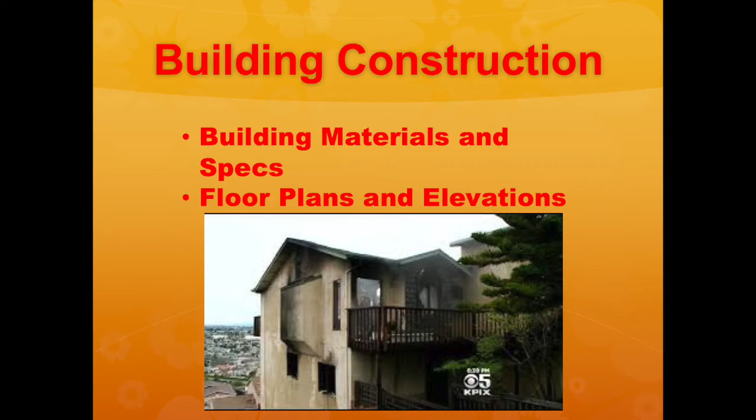Building construction. I'm going to talk about the building materials and specs used on the structure and also show you the floor plans and elevations. Later on, I will discuss how the fire started and how it developed. It was a 4-story structure, approximately 4,000 square feet. On the second floor, it had a roof deck, kitchen, dining, and living room with a balcony on the rear.

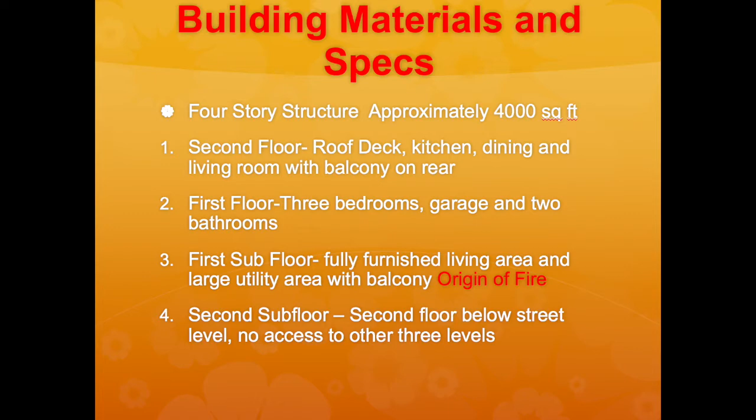On the first floor, it had 3 bedrooms, a garage, and 2 bathrooms. On the first subfloor, it had a fully furnished living area and large utility area with balcony. This is the origin of fire. The second subfloor had no access to the other 3 levels. Roof type was flat. Exterior used was a 5/8" plywood siding on the first and second floors. Stucco was used on the first and second subfloors.

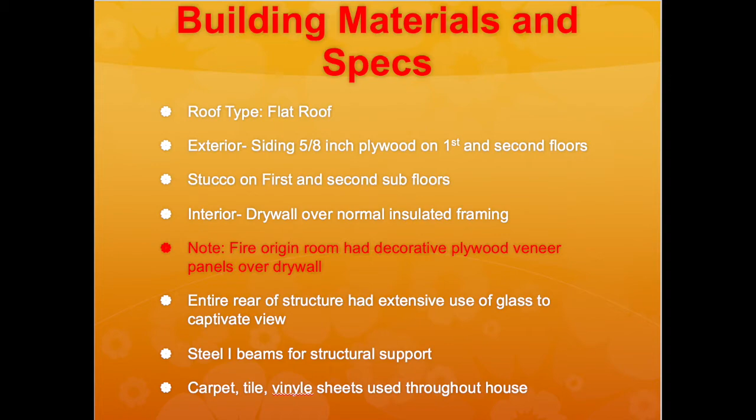Interior was drywall over normal insulated framing. Fire origin room had decorative plywood veneer panels nailed onto the drywall in the entire room. This created an additional fuel source for the fire. The entire rear of the structure had extensive use of glass to captivate the views. Steel I-beams for structural support were used, and carpet, tile, vinyl sheets used throughout the house.

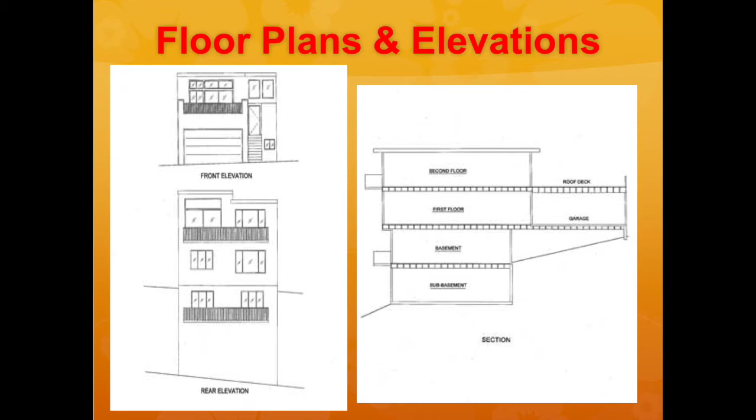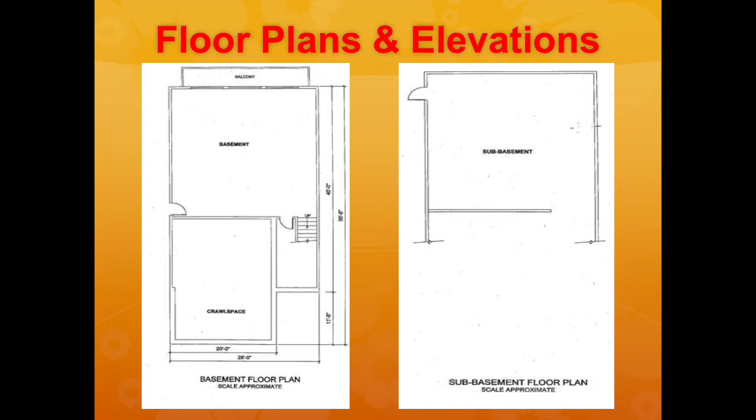This is the first and second subfloor plan. Basement floor where the fire started. How did the fire start? The fire started on the west side of the family room in the first subfloor. Fire ignition was initiated by a handheld vacuum cleaner located near the rear basement windows. The closest significant fuel package was a couch in the middle of the room.

Failing of the window near the origin allowed oxygen into the depleted oxygen environment, which caused flashover. This extreme heat followed the natural flow path across the floor level, up interior stairs where both firefighters were located. First subfloor also had a wooden balcony, carpet in the entire room, as well as wood bookshelves and end tables for fuel. There were 3 developments in the fire growth.

The first was the initial couch fire from the vacuum cleaner electrical malfunction. That is indicated by the 1. The second was secondary furniture fires in the room. These were end tables and bookshelves and other furniture. These are indicated by the number 2s. And the third development was the balcony fire that occurred after the window had failed. The fire jumped into the balcony and flashover occurred. And this is how the fire developed.

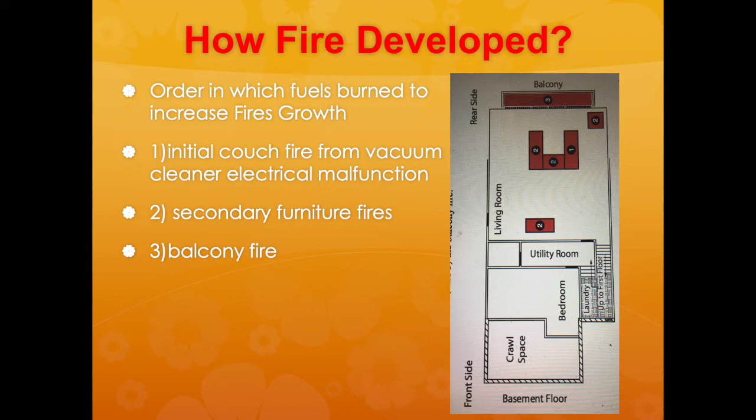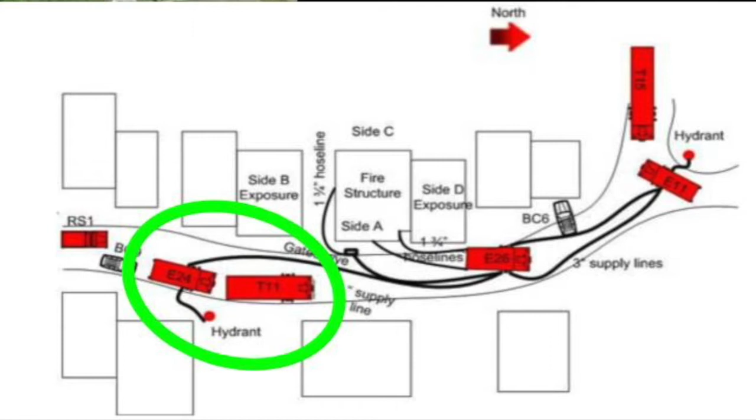Many engines arrived on side A of the house. Engine 26 was the first crew who entered the house. Engine 11 and Engine 24 arrived on scene afterwards, along with Rescue Squad 1, Truck 11, Truck 15, the Battalion Chief 6, and the Battalion Chief 9. For the apparatus layout, Engine 24 was on the far left side next to the hydrant. They were supplying water to Engine 26 with a 3-inch hose line.

Engine 11 was already on scene with a 1 3/4 hose line, but they also had a 3-inch hose line connected to Engine 26. They were located on the far right next to the hydrant. While Engine 26 was already in the house, they had their emergency signal on, which was announced from dispatch. That is when the incident commander took charge and contacted Engine 26 via radio multiple times, but they did not respond.

The incident commander then assigned Engine 24 and a split crew from Rescue Squad 1 to back up Engine 26. The incident commander then wanted the rescue squad to try to make entry through the garage, but they could not advance due to extremely high heat conditions. Then the battalion chief forced entry with Engine 11 on side B. Engine 11 entered with a 1 3/4 hose line. Simultaneously, Rescue Squad 1 re-entered on side B.

This was all done with zero visibility conditions, which is when they found the lieutenant and the firefighter already downed. They informed the incident commander that the lieutenant and the firefighter were found right away. However, the incident commander was not aware that they had been badly injured. Once the incident commander was alerted of their injuries, they were then rushed to the hospital immediately.

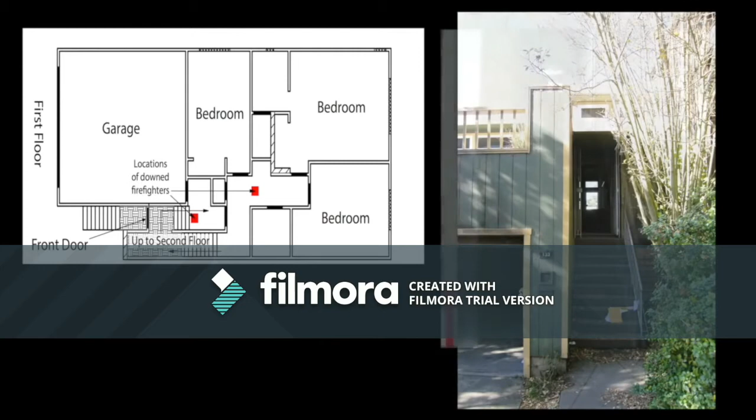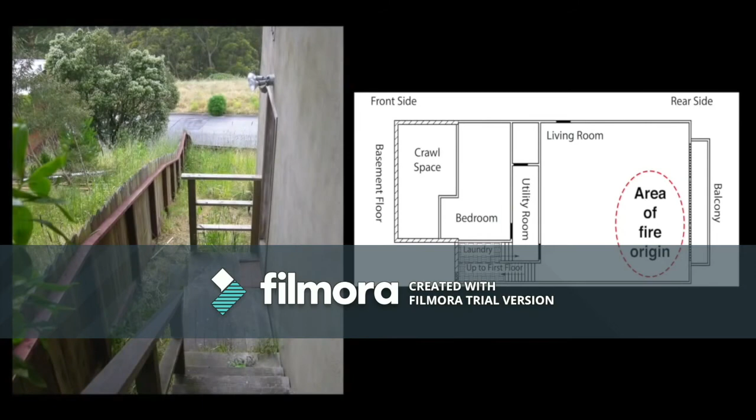Battalion Chief 9 arrives on scene at 10:53 hours. At 10:54 hours, Battalion Chief 9 has a face-to-face with victims 1 and 2. The Battalion Chief is informed by the victims that the fire is below the first floor. Battalion Chief 9 informs victims 1 and 2 that they are going to attack the fire from side Bravo of the house. The victims acknowledge but do not follow Battalion Chief 9 outside.

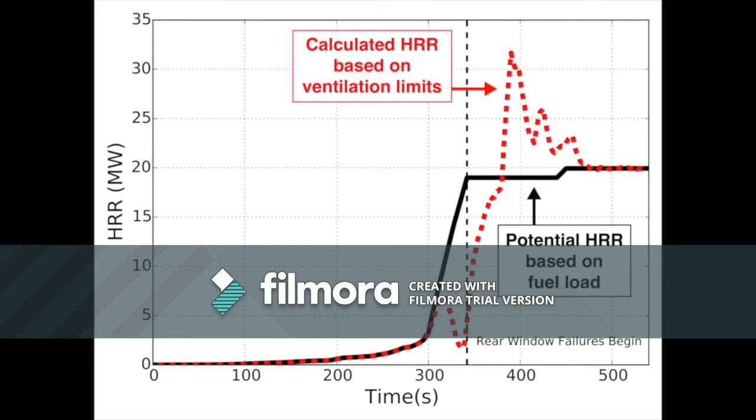At 10:58, the fire self-vents through a 6-panel wall of windows on the Charlie side of the house. The heat release rate quickly rises from less than 5 megawatts to around 25 megawatts within a period of 1 minute. The natural air ventilation that occurs from this window failure pulls fresh, cold air into the basement and up the stairs, creating a funnel of new hot gases into the first floor hallway where Engine 26 is operating.

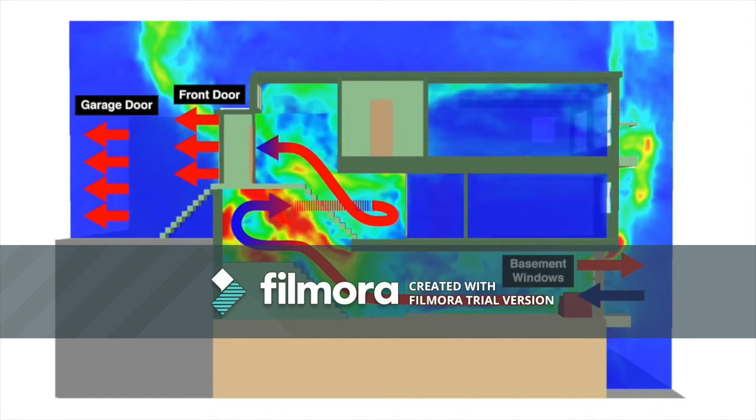At this point, the situation on the first floor shifts from tenable to untenable, as the temperature quickly rises from around 300 degrees Fahrenheit to over 700 degrees Fahrenheit. At 11:05 hours, 2 engines, a truck, Rescue Squad, and Battalion Chief 9 are directed by Incident Command to search the top 2 floors. Incident Command believes that Engine 26 is with Battalion Chief 9 on B side.

At 11:08 hours, Engine 24 Lieutenant finds victim number 1 in first floor stairs to basement and garage. Seconds later, Engine 24 Firefighter finds victim number 2 in first floor hallway. By 11:10, victims have been removed from the house and 2 medic units are called in. Victim 1, a lieutenant, was pronounced dead at the hospital. Victim 2, a firefighter paramedic, died 2 days later. Victim number 1 had 40 to 50% burns to his body, while victim number 2 had 30 to 40% burns. PPE was unharmed.

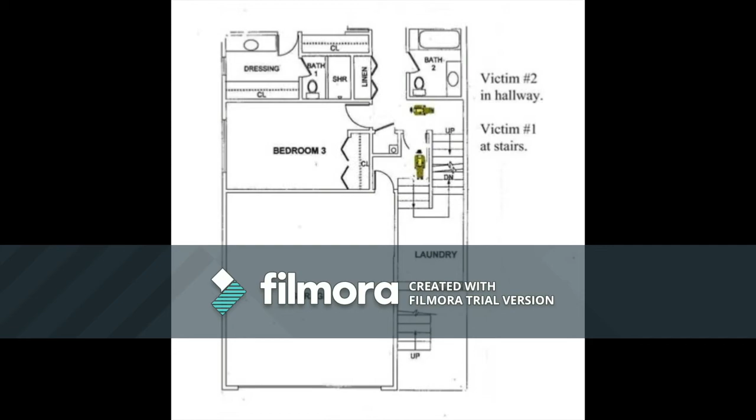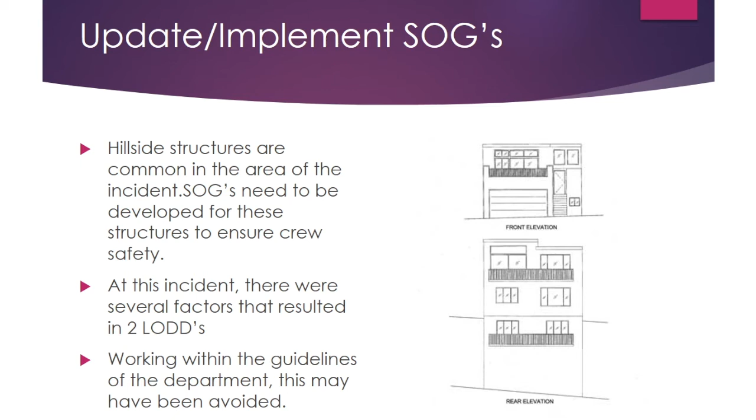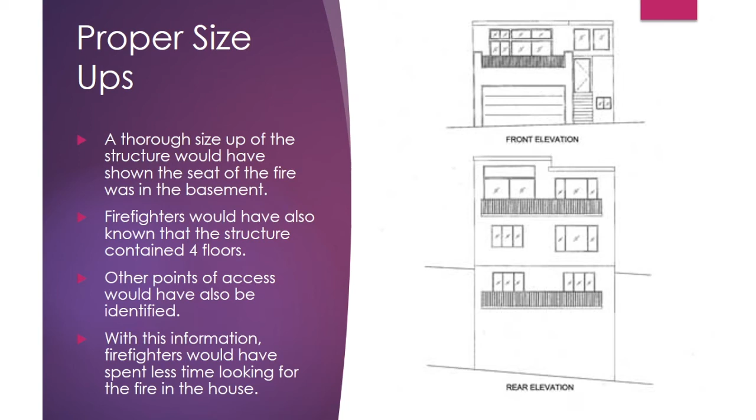Proper size-ups. A thorough size-up of the structure would have shown the seat of the fire was in the basement. Firefighters would have also known that the structure contained 4 floors. Other points of access would have also been identified. With this information, firefighters would have spent less time looking for the fire in the house.

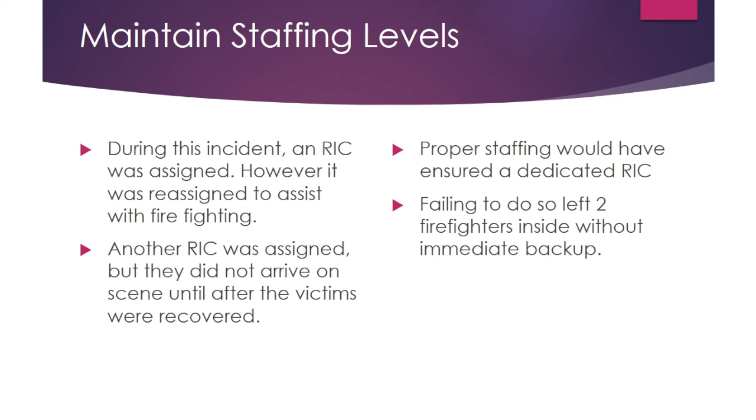Maintain staffing levels. During this incident, a rapid intervention crew was assigned. However, it was reassigned to assist with firefighting. Another rapid intervention crew was assigned, but they did not arrive on scene until after the victims were recovered. Proper staffing would have ensured a dedicated rapid intervention crew. Failing to do so left 2 firefighters inside without immediate backup.

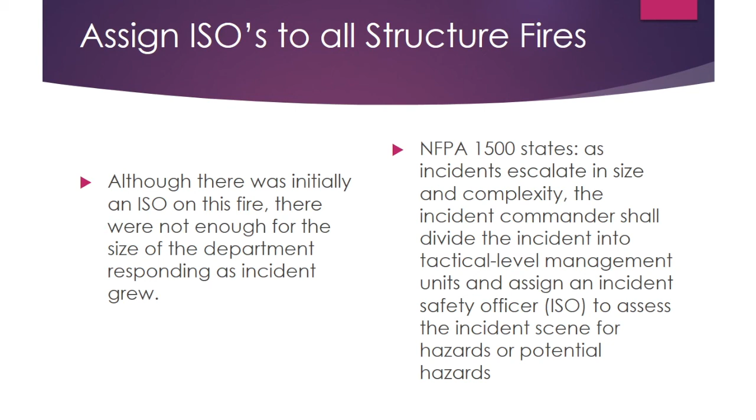Assign incident safety officers to all structure fires. Although there was initially an incident safety officer on this fire, there were not enough for the size of the department responding as the incident grew. NFPA 1500 states, as incidents escalate in size and complexity, the incident commander shall divide the incident into tactical level management units and assign an incident safety officer, ISO, to assess the incident scene for hazards or potential hazards.

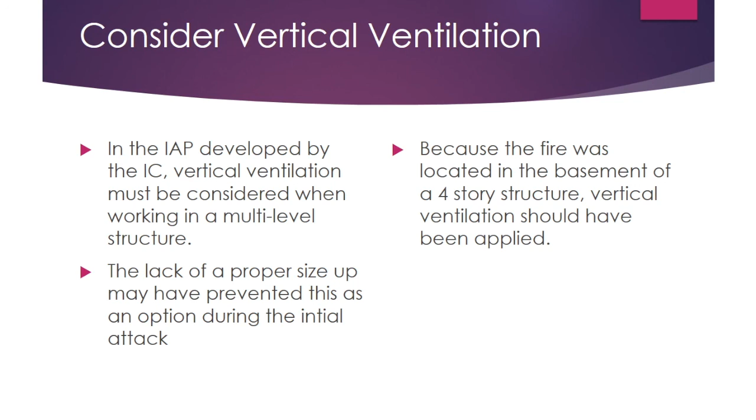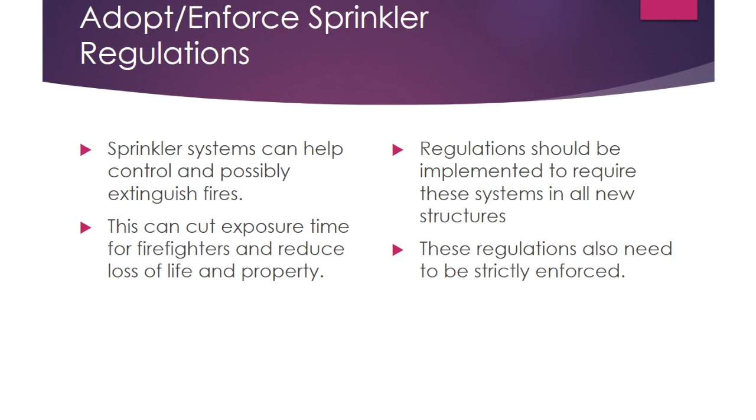Adopt and enforce sprinkler regulations. Sprinkler systems can help control and possibly extinguish fires. This can cut exposure time for firefighters and reduce loss of life and property. Regulations should be implemented to require these systems in all new structures. These regulations also need to be strictly enforced.